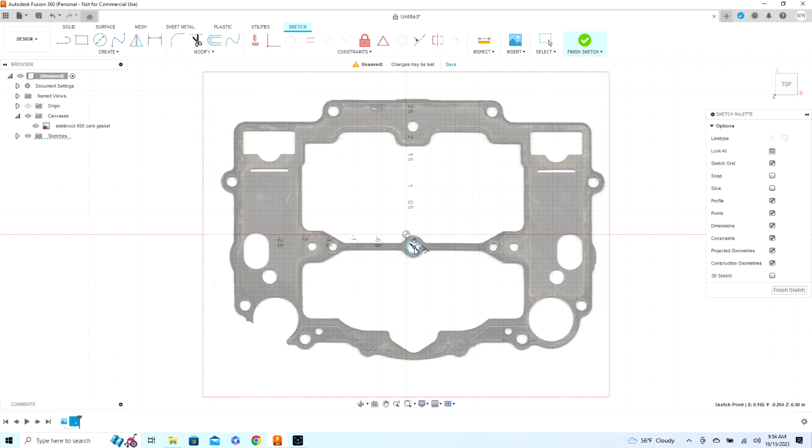Now I thought about cutting short this hour-long footage, but I sped it up 8 times, and I'm gonna leave it in so y'all can see everything I did and the whole process of making the gasket. I know there's steps that I could have taken to make this easier, but like I said, I'm still learning this program, and this is the way I decided to do it. So y'all sit back and watch the fun.

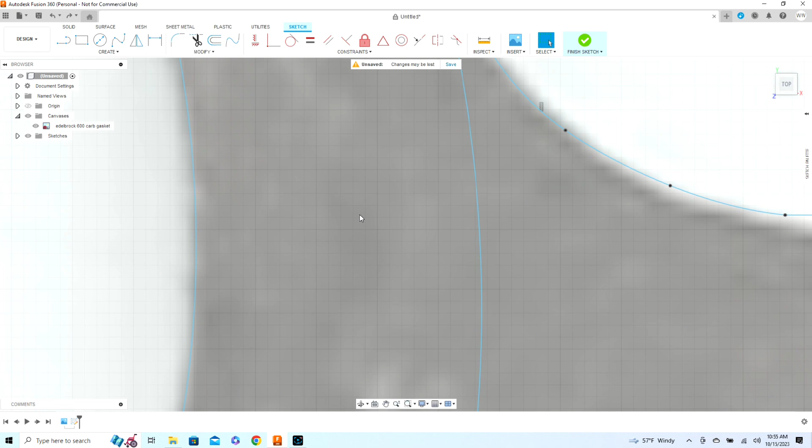Here is the gasket, 100% designed. All the corners rounded and everything. So now we're going over here, and this is what the gasket's going to look like. I'm going to finish the sketch.

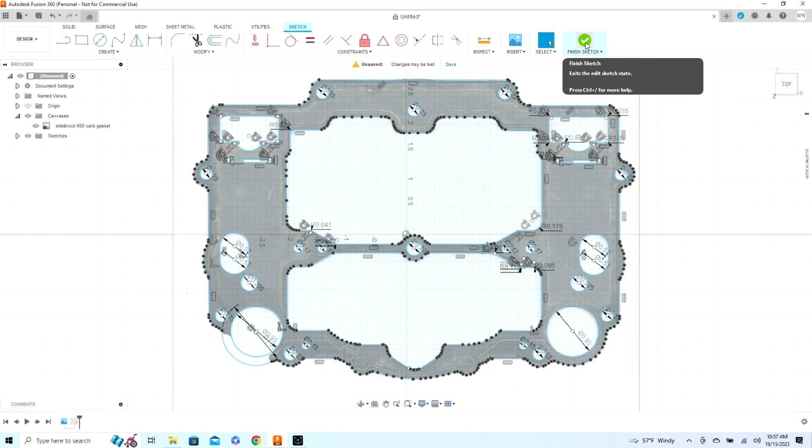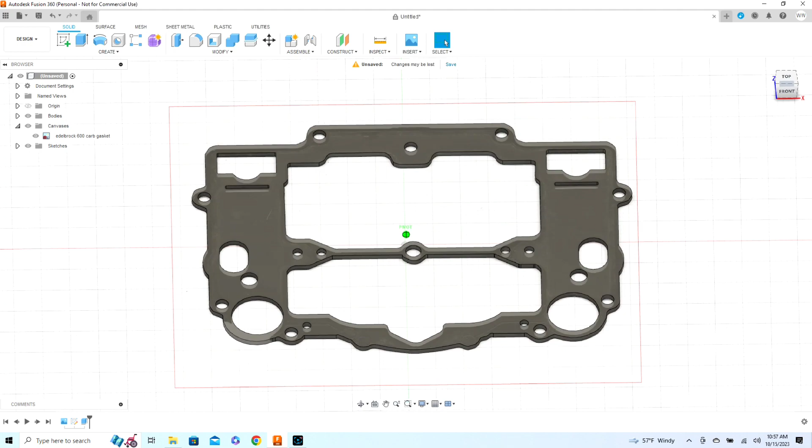And then go over here to extrude. Select the area that you just designed. Enter in the measurement. This measurement really doesn't matter. It's mostly for visuals in the program. It's not really going to translate to the gasket itself. So any thickness will do. I just do 0.1 just so it can have some kind of dimension.

Now in this Fusion 360 program, you want to name your gasket so you can always make changes to it later if you want to. And then we're going to export it to an SVG file that the Cricut machine can actually see.

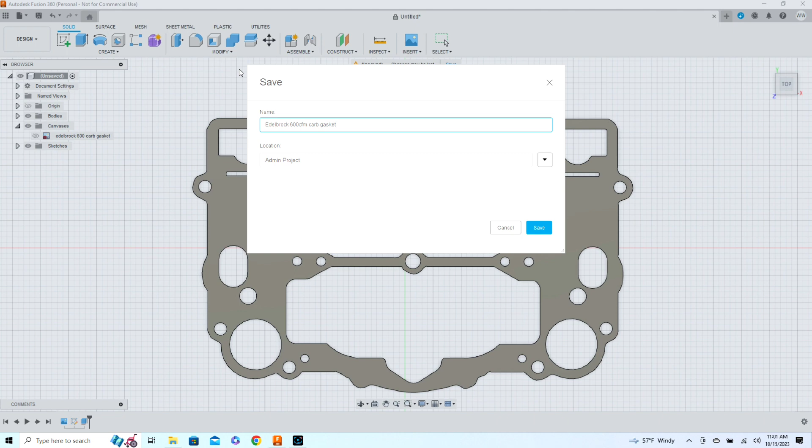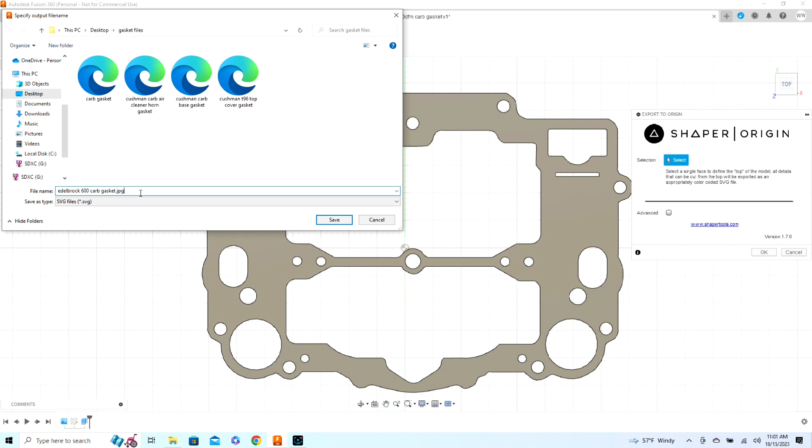You go to your utilities, and then this Shaper Origin thing that I actually had to download to export to the SVG. And once you have that named, you click save, and now we're going to the Cricut program.

Go to new project. Takes a second for it to load sometimes on my computer. Everything's still popping up. There it goes. Alright, you go to upload. You can see some of the gaskets I've already made. And then go to the SVG file that we just exported. There it is.

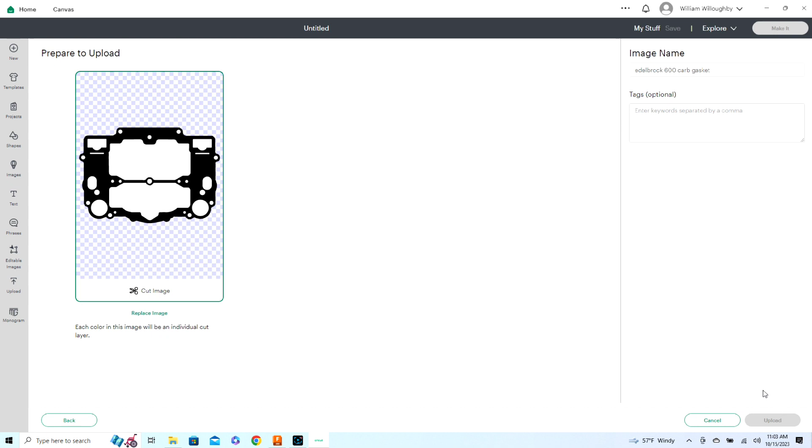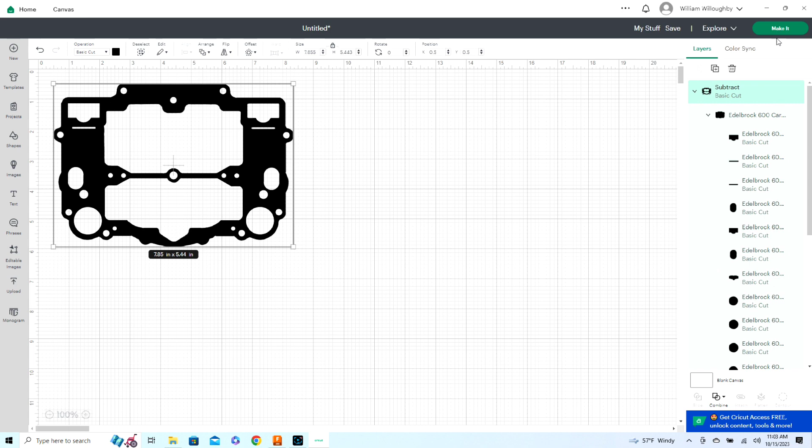Now click on the gasket and add to canvas. Now before we print, before we do anything, we have to combine this. So with that whole line selected, you go to combine and then subtract. And with that done, we click that. Now we're adjusting how the machine is going to cut it out on the mat.

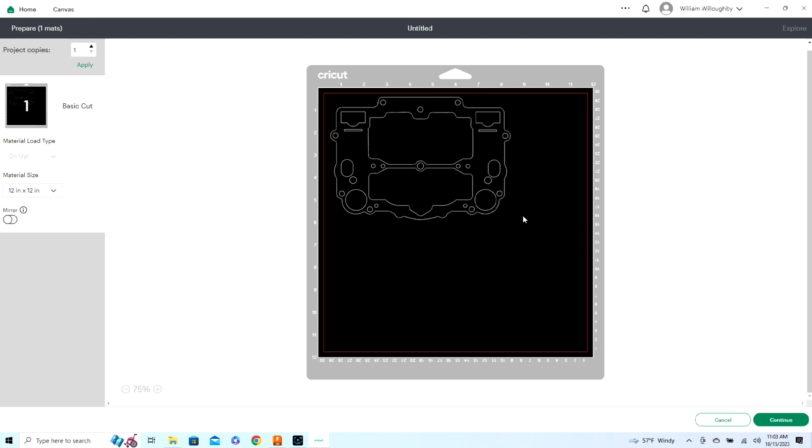And now what I'm doing is setting up the mat itself with the gasket material and getting it ready to load into the machine. Getting it connected to my computer. And the blade that I have is the deep blade, so I changed the tool to the deep blade, and now I'm getting it loaded into the machine and ready to hit go. And once you hit go, the program will give you a status report, and you can watch it cut out, which is really cool.

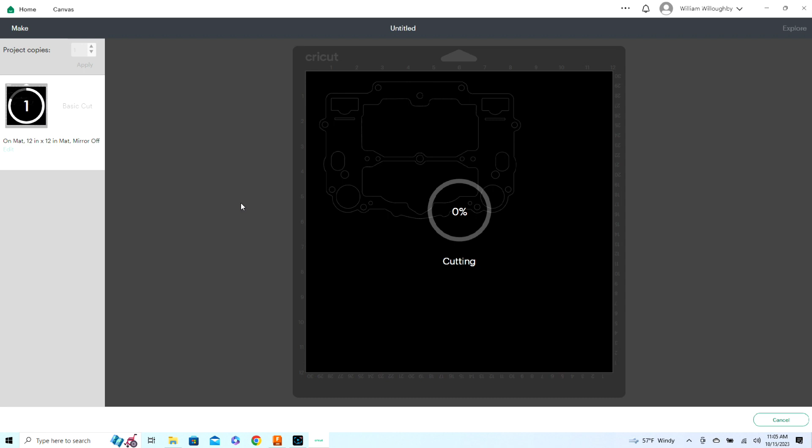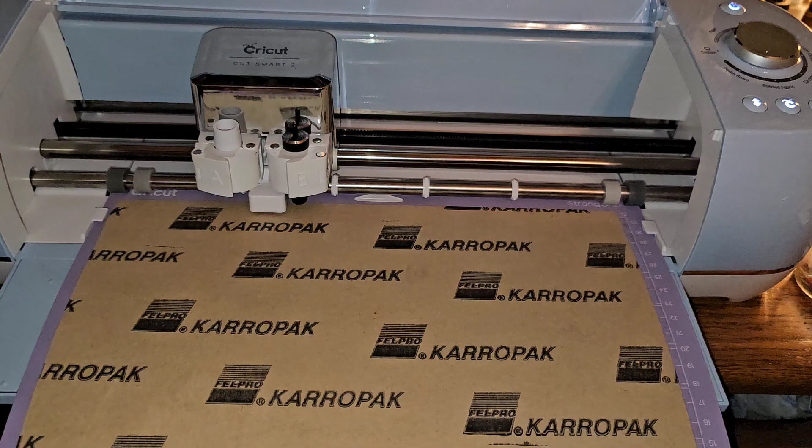And I am no expert on this stuff yet. So I'm sure there's steps that I'm missing that I could do to make things easier. Probably don't have to do certain things, but this is just me learning, and I wanted to share the potential of this program.

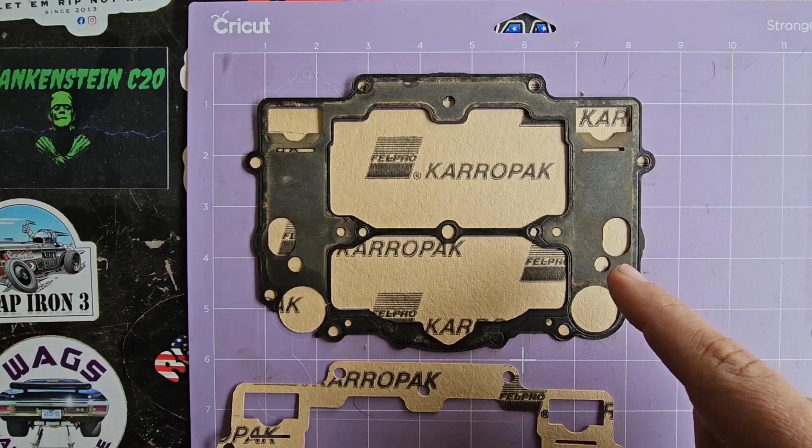Well, the gasket is cut, so let's pull it off this mat and see if it matches up. Just want to give you all a good look at what it looks like. Still on the mat, but all the little sections are cut out. So let's pull this off. Well, it cut it out pretty good, and as you can see, I put the old one on here just for show, and everything lines up perfectly.

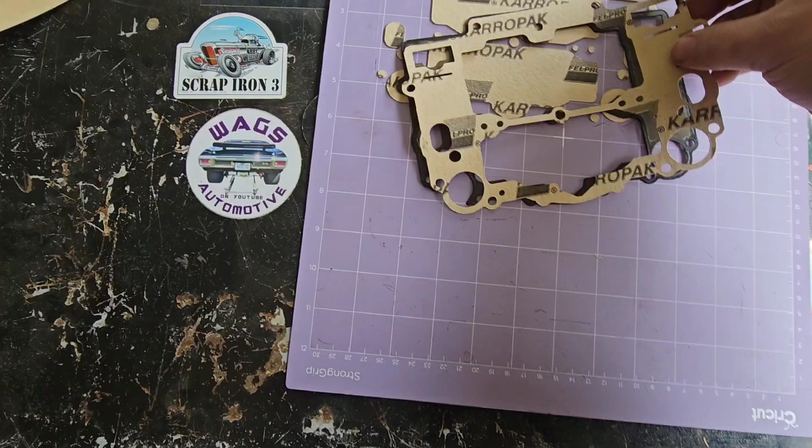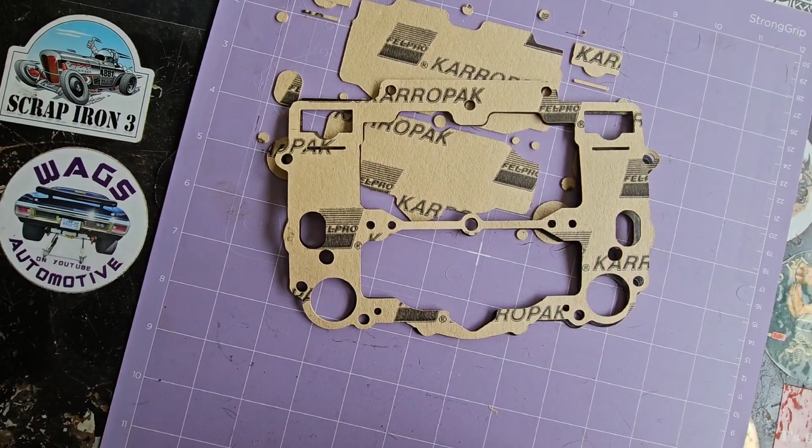So, which means I just basically printed off an Edelbrock 600 CFM carb gasket. Everything lines up. Just need to put the carburetor back together, and it's all good. And there we have it. Gasket is made. I was able to reassemble that carburetor with no issues. Everything lined up perfectly. Didn't have to trim anything.

If you're good with computers, I highly recommend using this method if you happen to have a vinyl cutter or want to get one. You can make your own gaskets, you can make your own decals and all other kinds of stuff with it. But if you're good with computers and you're a car guy or car lady and want to make your own gaskets, I highly recommend this method. I'm probably going to be making more gaskets than vinyl stuff on my Cricut machine. So I'm gonna have fun with it, with everything it can offer.